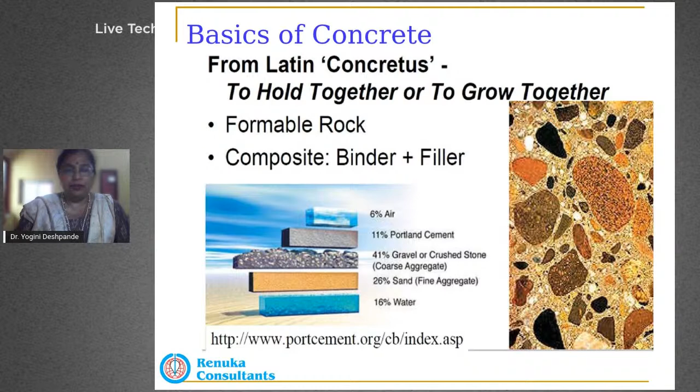Now, the uniqueness for us as civil engineers is that we are constantly moving between three scales. We design for, say, a 100-meter building, but that design is based on the strength of a cube, which is 15 centimeters, and the cube strength is developed based on the micro and nanoscale materials used to make the binder and the concrete itself. So the beauty of our work is that we constantly move between a macro scale, a meso scale, and a micro scale.

As civil engineers, we have to be aware of the effect of any defects that happen at a micro scale on the macro scale, or what may happen at a macro scale due to defects at a micro scale. So what I mean is, if there are shrinkage cracks, these typically happen at a micro or meso scale, but the effect is seen on the structure in a larger way, where there might be a structural failure because of inadvertent shrinkage cracks.

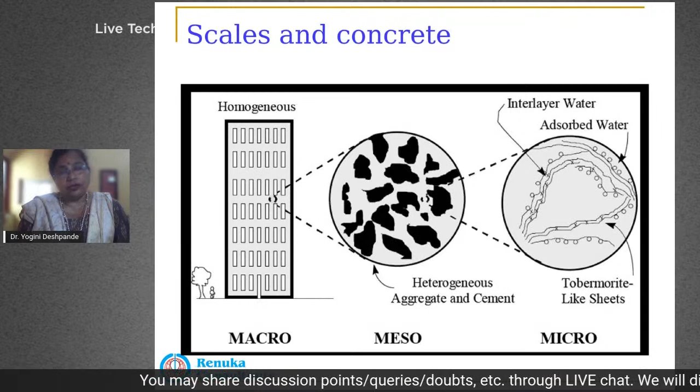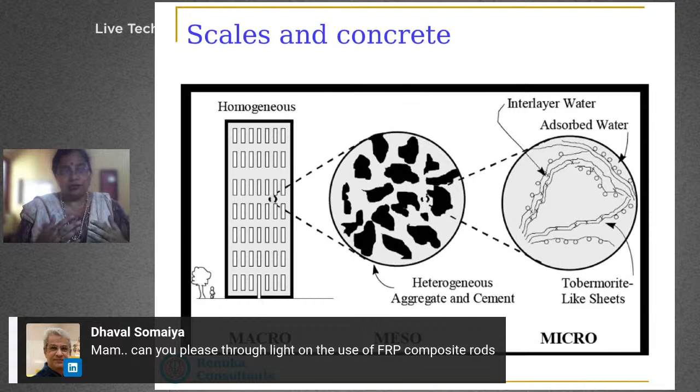The other way around, if we have a fire in a building, or any fire in a concrete structure, the structural failure happens because there is a large change in the microstructure of the concrete, and there are chemical changes that happen within the concrete during a high temperature fire, which causes structural failure, which may or may not be evident post the fire.

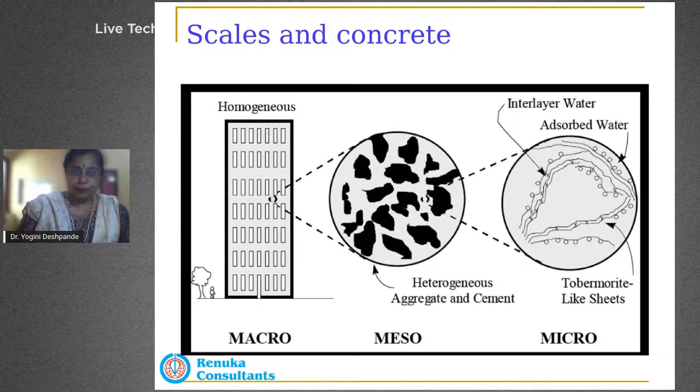So there's this aspect of where we have to, as civil engineers, be conscious about what is happening at different scales and how each is affecting the failure aspect on a long term basis. So for a very long time, till about early 2000, concrete was considered as a mixture of cement, water, fine aggregate, and coarse aggregate, and it was more like it's even today like a baking process.

That if you have certain ingredients, we calculate how much amount they have to be, and we put it together, and sort of, just as we bake a cake, we would make concrete. Today, we are continually using mineral admixtures and chemical admixtures to ensure that the concrete is sustainable for a long-term performance. In the past 15 years or so, the usage of mineral admixtures in the form of fly ash, slag, and silica fume has increased extensively. Because of the usage of these mineral admixtures, we're having to use chemical admixtures.

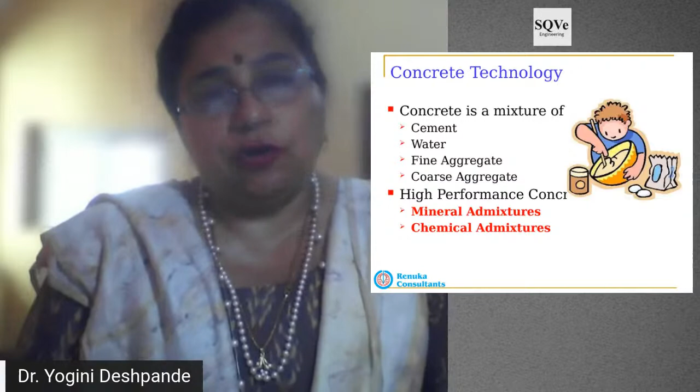So all of these have changed how the concrete behaves, how it performs, and what we are able to derive from the concrete very extensively in the past 15 to 17 years. And as a concrete technologist, as a concrete user, what we need to understand is how each ingredient affects the behavior of the concrete, how we can utilize the best aspects of each of these ingredients to make the concrete sustainable, to make the concrete durable. So be it cement, be it water, fine aggregate, or the mineral admixtures.

As a concrete technologist, I think it is very essential always to know what each ingredient is, how it affects the quality of the concrete, how it affects the performance in the initial stages, during the manufacturing, during the processing, during the travel, during the placement of the concrete, as well as during the hardening stages.

And if we are able to understand these aspects, then we are able to harness these qualities for a good performance concrete. And if we are not able to understand what these aspects are or how they are interacting with each other, then it becomes difficult to harness the properties and to have a good performing concrete.

And one of the major problems that occur at site is this lack of understanding, lack of knowledge that may be there, that does not allow us to harness the complete good aspects that can be derived from a particular material that we are using.

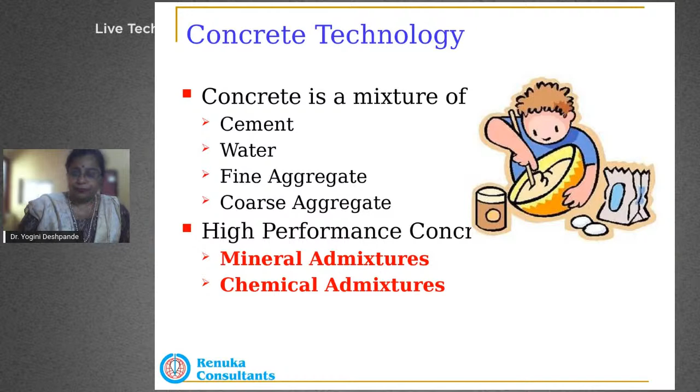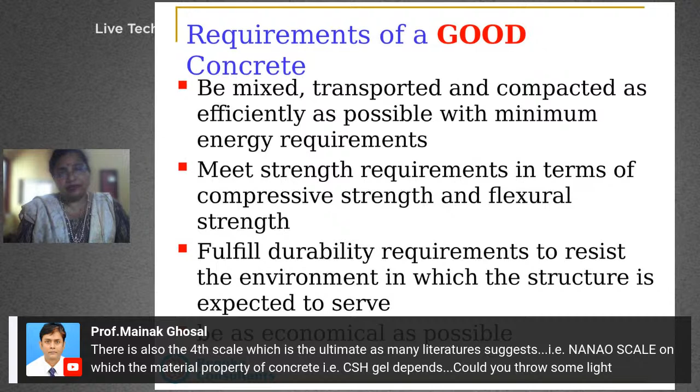So requirements of a good concrete typically are that it be mixed, transported, and compacted as efficiently as possible with minimum energy requirements. So your pumping requirements should be minimum. You don't want to have a higher amount of fuel to be utilized, higher amount of pump capacities to be utilized. You want to have good strength requirements in terms of compressive and flexural strength.

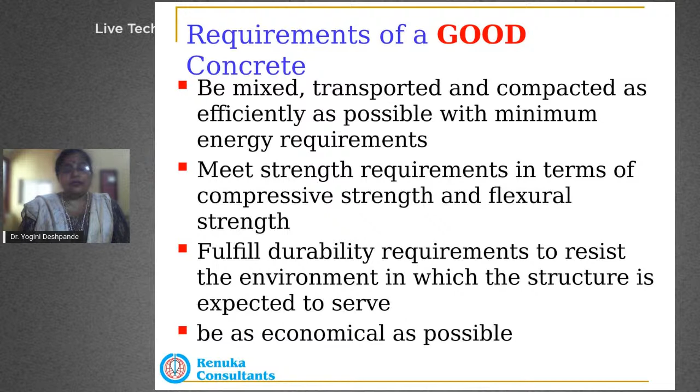You'll be able to fulfill durability requirements to resist the environment in which the structure is expected to serve. And while it is doing all of this, it has to be as economical as possible, so that we are able to ensure that for every paisa that we spend, we are able to get a long-term service from it.

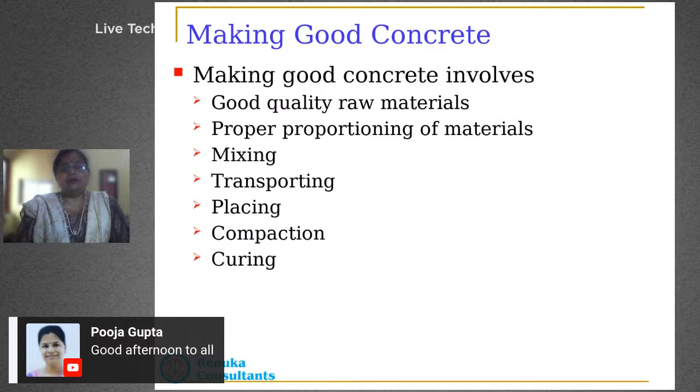So what happens is, when we are making good concrete, it involves ensuring that we have good raw materials, we have proper proportioning of materials, mixing is being taken properly, transporting, placing, compaction, and curing. All these aspects are being maintained during the whole process.

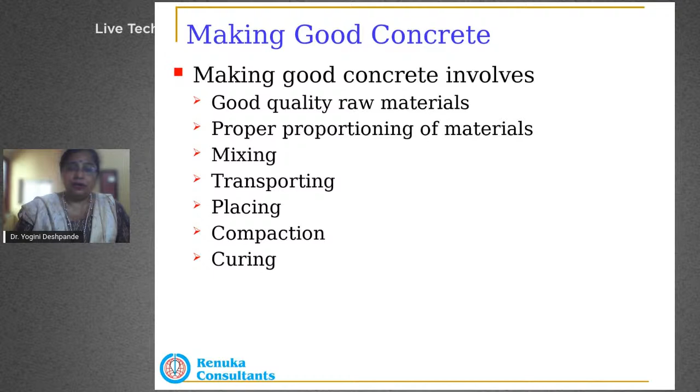Now, there are certain weak links that are there in concrete. When you have to have a good quality concrete, we have to ensure that the water quantity is correct. Anything less or anything more affects the strength, affects the segregation properties.

The aggregate quality should be good, the gradation should be correct. A very harsh mix results from aggregates that are of only a particular size in itself. There's not a smooth curve on gradation of the aggregates.

The volume also impacts majorly on segregation and compaction abilities. It also impacts impurities. If there is more clays or fines in the fine aggregates, it affects typically the ability to placement, as well as slump loss that happens at site because of these aspects.

Admixtures - the major issue that happens with admixtures is cement compatibility, but I believe the admixture industry today has resolved this extensively by ensuring there is a proper technical salesperson to ensure that for a given cement, a proper admixture is given to the concrete supplier. But the major aspect that many times happens is the addition.

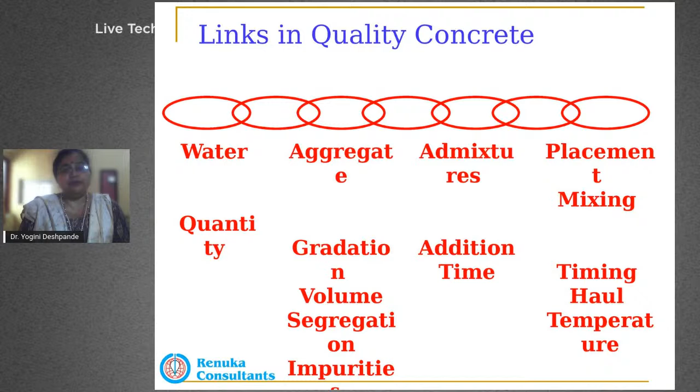Now, the addition and the timing of it depends primarily on what is the duration for which the trucks are going to be transporting the concrete. If the duration is less, we could have the whole addition at the beginning itself. But if the duration between the time it leaves the RMC plant and arrives at site is more, you typically want a half and half approach, where you add half the admixture dosage in the beginning, and the rest just a little bit before placement, or halfway through transportation.

This depends partially upon how much cementitious material is being used in the mixture, and also what kind of admixture we are using. If we are using SNF based admixture or PCE polycarboxylate based admixture, this also decides the amount of addition, as well as the time of addition of the admixture.

The placement and mixing, both of these make a major impact on the quality of the concrete. Placement basically deals with the aspect of pumping. If it is a high-rise building, pumping is a major issue. You have to ensure the concrete remains in a good, pumpable condition, with no segregation happening even while it is being pumped to 20 or 30 stories, and then being placed.

The placement and the mixing depends upon the time of day, the time it is going to be hauled from the RMC plant to the location where it will be poured, and the temperature at that time. All of these aspects affect the placement and the mixing.

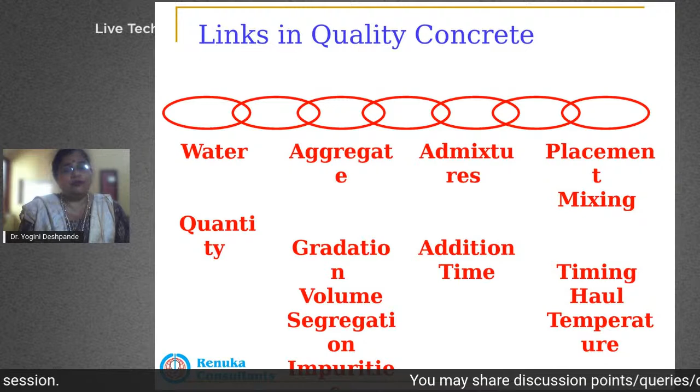For this, we have to ensure we are either using cooler water, ice, or icicles during mixing, or try not to do the placement during the middle of the day, between 12 to 4, and only do it in the early morning or later in the evening.

Now, coming to understanding of the cementitious materials, or what materials are being used, be it cementitious materials or aggregates - what are their properties, and how we are using them, how we can possibly use them - is very necessary.

With cement these days we use a lot of fly ash. We also use slag or silica fume. Cement is a much coarser cementitious material compared to silica fume or even slag. Fly ash is along similar lines to cement, but a little finer than cement at times. You do get ultrafine fly ash, which is much finer in particle size than cement.

So when making a mix design, understanding how the packing density is going to work for the concrete mix design is important, because we are designing for 1 cubic meter of concrete. What we start off with is the larger size aggregate, then smaller size aggregate, then fine aggregates, followed by cement, and the nano size particles that act as filler, as well as taking part in the chemical reaction with the calcium hydroxide. All of this has to be noted and ensured when designing the mix.

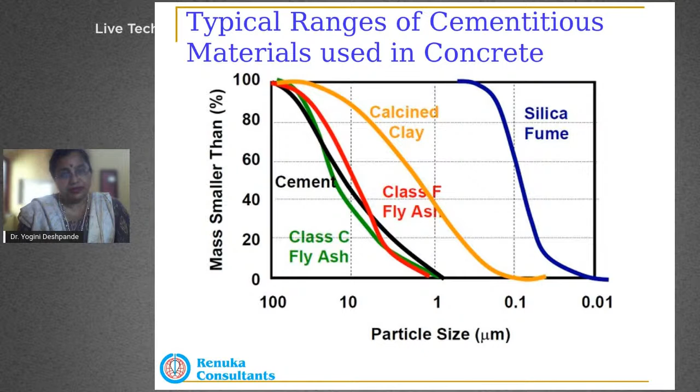What happens when we use supplementary materials is that typically for fly ash, we are able to reduce the water demand to a certain extent. This helps us in the strength, and this also helps us in the workability. Even with slag, it's the same thing. We are able to reduce our water demand while increasing the workability.

With silica fume, because it is a much finer material, one of the finest materials used in concrete today, there is a higher water demand. To counter this, we then have to use better chemical admixtures, which are slightly on the expensive side. The workability is also slightly reduced in case of silica fume. It's a stickier mix compared to fly ash or slag.

Bleeding typically is always reduced when we use any of these cementitious admixtures, and this is one of the biggest positive aspects of using supplementary cementitious materials. Once we have controlled bleeding, we're also able to control the segregation of the concrete.

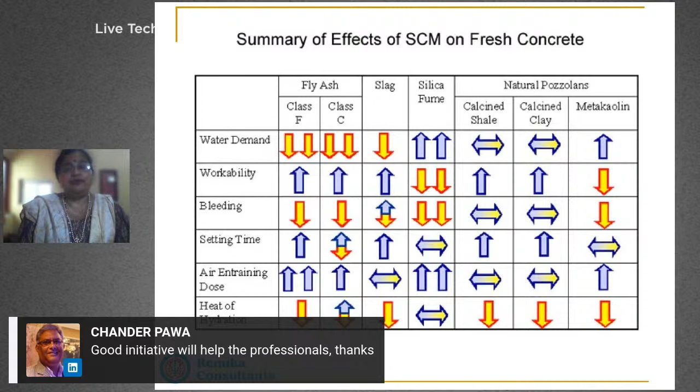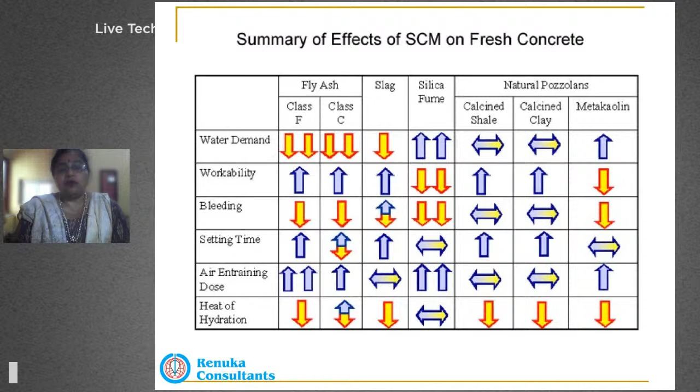So typically fly ash and slag will always help you control the amount of shrinkage that can possibly happen in the concrete. If you are having larger pours or larger size elements, it's always helpful to use fly ash or slag in the mix.

Early age strength gain is an important aspect for structural engineers because they want to start the next floor, the next stage of structural elements as soon as possible. Typically, if you use only cement and fly ash, it tends to give larger benefits in long term strength and durability, but not in early age strength. This can be countered by either using slag with fly ash, or using a ternary mix of silica fume with fly ash, or Alccofine with fly ash. This will help in having early age strength gains compared to just using cement and fly ash.

All the cementitious materials always benefit long-term strength gain, and typically compared to control concretes for the same water to cement ratio, anywhere between 5 to 7% up to about 30-35% increase in strength can be achieved.

Permeability - water permeability, rapid chloride permeability, all the different types of permeability issues we may have will get definitely reduced, because supplementary cementitious materials react with the calcium hydroxide generated in the cement hydration process after about 2 or 3 days. Once it starts reacting, the amount of pores developed in the concrete gets reduced, and this helps ensure a more impermeable structure.

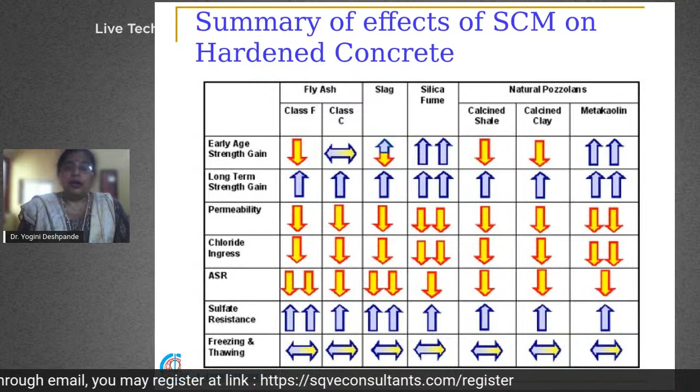Same thing with sulfate resistance also - all of the SCMs typically increase the sulfate resistance of the concrete. So what I'm trying to say through these two-three slides is that all aspects of concrete making depend on us understanding the positive and negative benefits of using different materials in concrete. If we understand and remember what each material brings to the table and how we can utilize it, then we're able to control the other issues that develop at site. Major issues that develop at site always happen during mixing and placing, or during curing and hydration hardening.

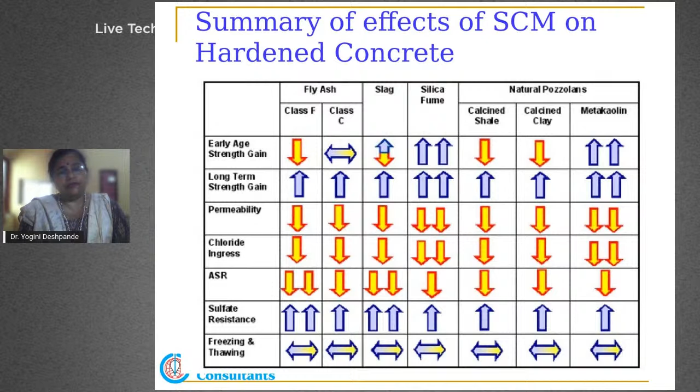Typically, from the first 24 hours to 7 days, cracking issues happen - early plastic shrinkage cracking happens. All these aspects can be controlled by ensuring we're utilizing proper materials, knowing which material gives us what property, and then ensuring the quality of these materials to have good concrete.

As I mentioned earlier, major issues that we have are a truck arriving late at site, which is related to admixtures, chemical admixtures, temperature or improper mix design of concrete itself, delayed curing, and shrinkage.

Now, what I'd like to point out in terms of improper mix design is this: many times builders or contractors do not have an understanding of how material variability happens. Cement is not the same cement - Ultratech cement is different, ACC cement is different, Ambuja cement is different. Not just that each cement is different, but each batch within each company could also be different. In the same way, aggregates - each lot of aggregate is also different.

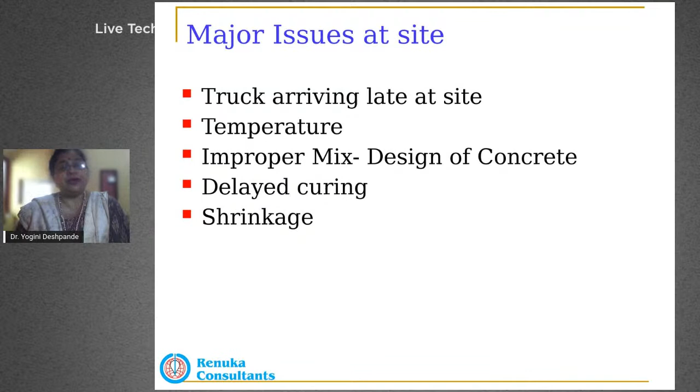So when you send materials for mix design, you have to send the same materials that you are going to use to prepare the concrete. The same should be sent for the mix design, and the mix design should be developed on that basis. Once you're able to do that, you're able to control the quality.

We have had many times people wanting to use a different cement for the mix design purpose, because the cement hasn't arrived at site, or whatever different issues they might be facing. What happens is that when we use one type of material for the mix design and another type of material during mixing - the name may be the same, aggregate may still be 20mm itself - but if the source is changing, if the batch is changing, then the quality of that aggregate has changed. Sometimes there's a large variability between what was used for the mix design and what is being used during mixing and placement during the concreting stage itself.

And this leads to a lot of issues. This leads to a lot of wastage of materials also. So if you are quality conscious from the beginning, you will be able to save at least more than 5 to 10% during the concreting process itself, if certain basic aspects are maintained right from the beginning, so that we achieve a good mix while concreting.

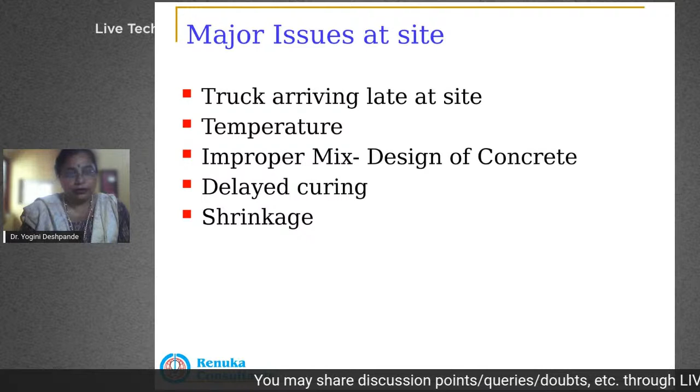I will stop here for now and see if there are any questions.

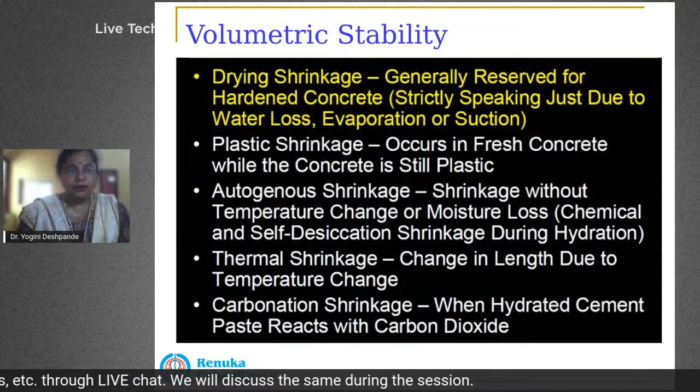Mr. Bhavin Shah, could we do that and then go back? Yeah, sure. Let us take a few questions, and then again we can discuss it further.

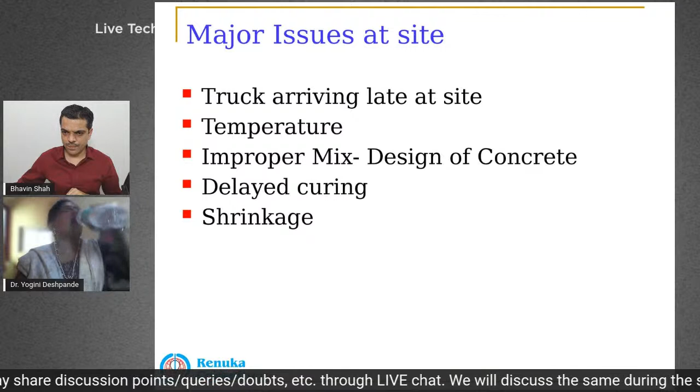One of the questions was: there is also a fourth scale, which is the ultimate, as many literature suggests, that is the nanoscale, on which the material property of concrete - that is CSH gel - depends. Could you throw some light on this? Okay, let me see if I have this.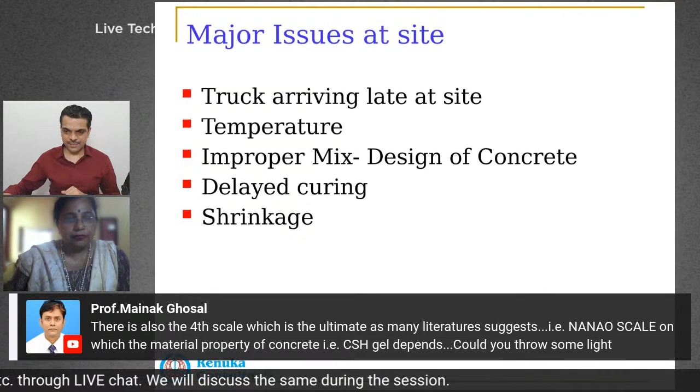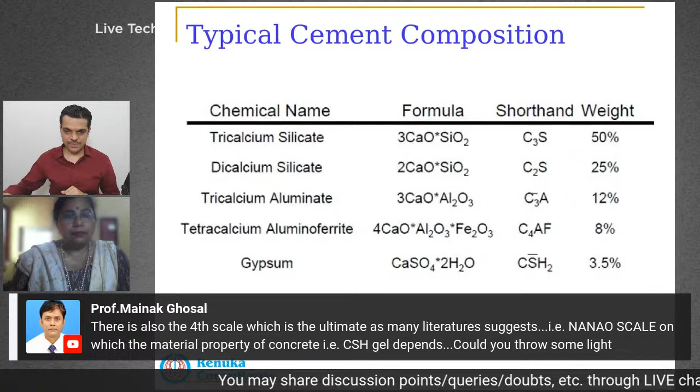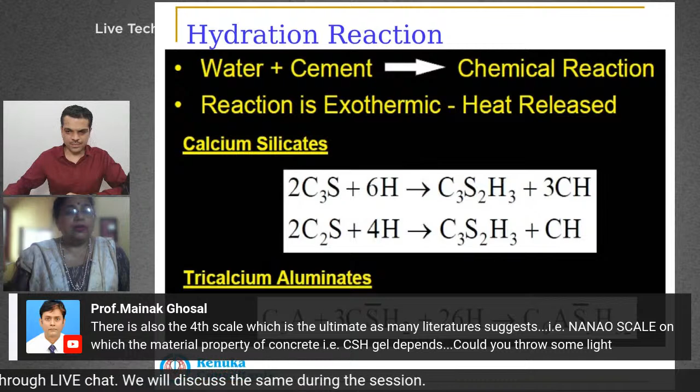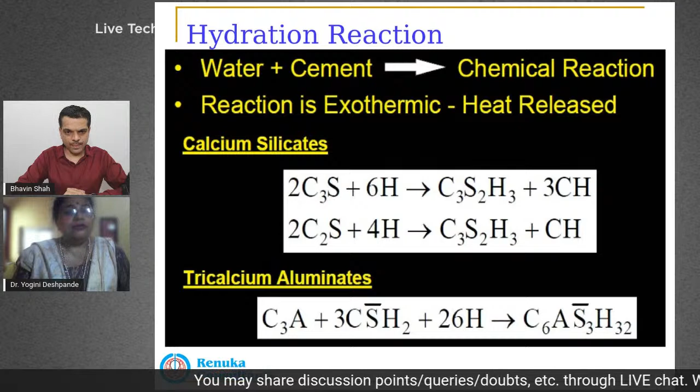Okay, so let's look at the basics first. What happens when water and cement react is a chemical reaction, and the reaction is exothermic. C3S, the tricalcium silicate, reacts with water to form calcium silicate hydrate and calcium hydroxide. The dicalcium silicate also reacts with water to form calcium silicate hydrate and calcium hydroxide. Tricalcium aluminate in the same way forms calcium sulfoaluminates.

Let me go back to one slide and explain how the cement hydration process happens. When cement comes into contact with water, a protective calcium silicate hydrate forms around the cement particle. This is when we're able to transport the concrete, because this protective barrier ensures there is no hydration occurring at that time. It just sits quietly, with a water layer all around the cement particle.

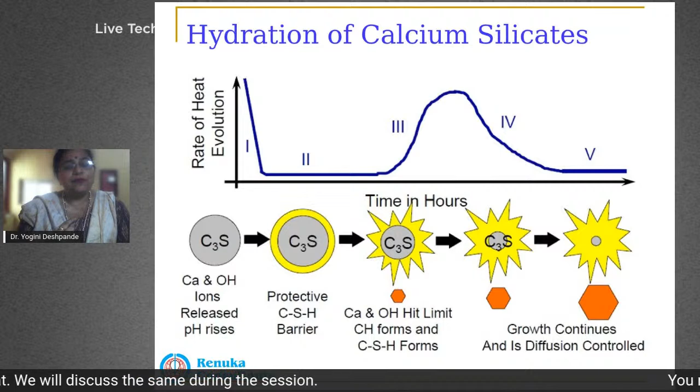The cement hydration process is similar—the hydrate product forms all around the cement particle, and that chemical reaction continues as the cement particle gets smaller. So after 24 or 36 hours, the particle has grown very small in size while the hydration product has increased in size.

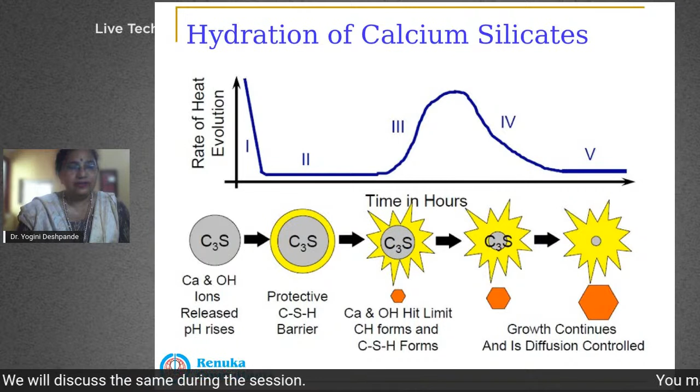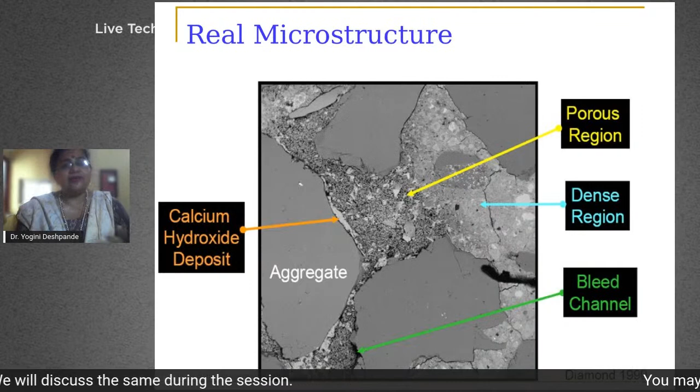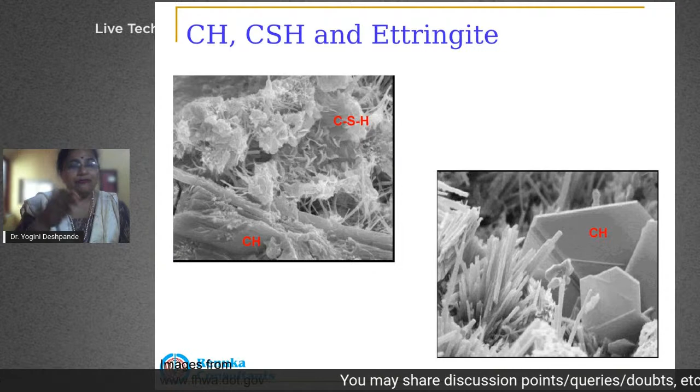This is what CSH looks like in a microstructure, while CH is more platy like. CSH is more amorphous and doesn't necessarily have a specific shape, but calcium hydroxide is more platy like, looking like stacks of files or plates placed one after the other.

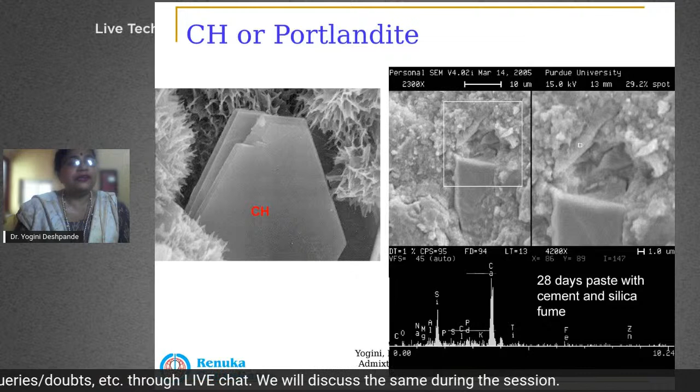This is an initial mix of silica fume, cement, and water, and you can see a lot of CSH is formed along with some CH. This is within about an hour's time of cement and silica fume being mixed together.

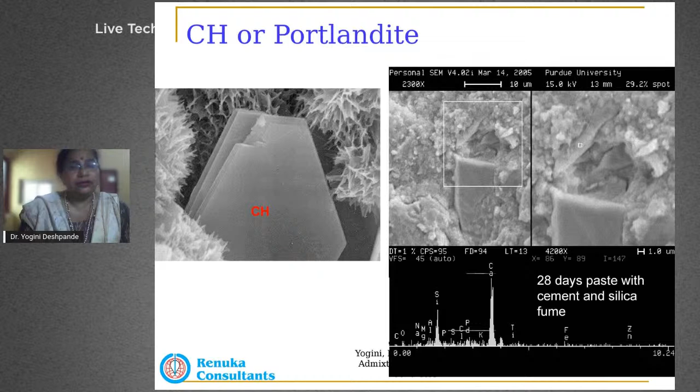This is much denser, as you can clearly see. This is at about 28 days with cement and silica fume, and you see such a dense structure has formed, with just one plate of CH remaining—not unhydrated, but a slightly more permeable aspect of the hydration product—whereas a larger amount of CSH is formed in case of silica fume concrete.

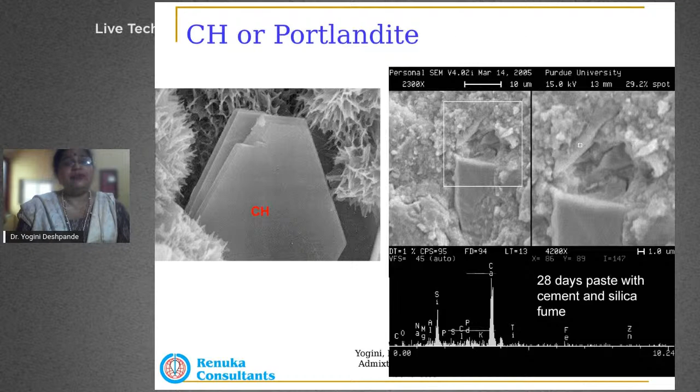This is why we say permeability is reduced considerably when we use an SCM: the presence of CH gets reduced, and any permeability that might remain within the concrete gets reduced, because much of the CH gets converted to CSH, which is a far denser product with very, very few pores left behind for water, chloride, or any other gaseous ingress.

One key takeaway is that cement doesn't necessarily completely hydrate when concrete is hardened. Some amount of cement particles continue to remain in that unhydrated stage over a period of time, and that is what is being

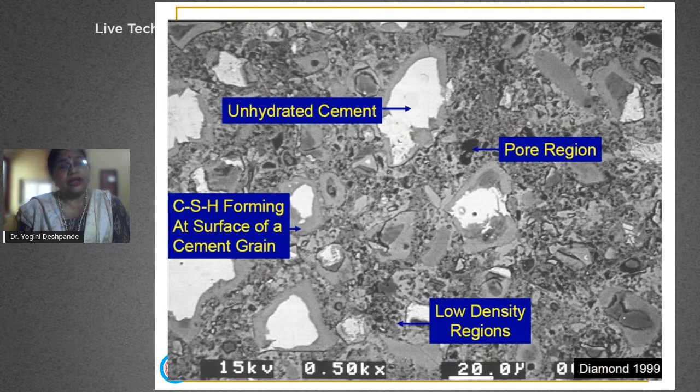utilized when we have certain waterproofing chemicals, or bacterial concrete being developed. The idea is that the unhydrated cement, or any CH that is formed, will react once a crack has happened, and certain CSH will get formed at that point, closing the crack again. Any next question?

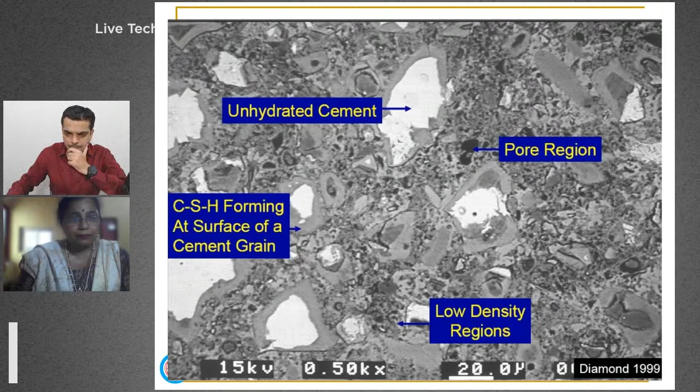Next, can you please share your views on green concrete, or if the concrete material which is obtained while dismantling of building can be used to replace cement at some percentage and increase the concrete strength?

Okay, great question. So green concrete, I'm not sure what you mean by green concrete. I'm assuming you mean using some kind of waste material, in which case silica fume is a waste material, fly ash is a waste material, slag is a waste material. So we have sort of mastered the art of development of green concrete in that sense.

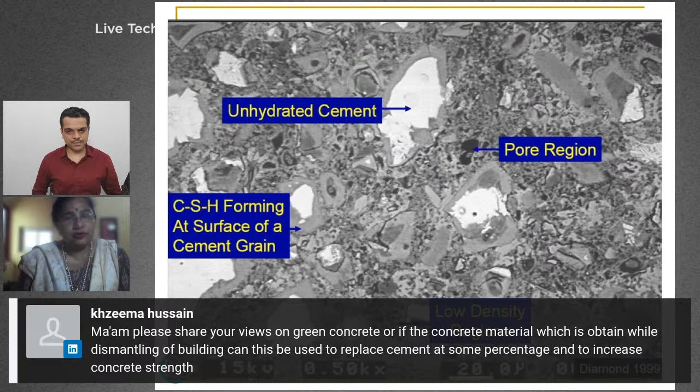Now, coming to your point of the demolished concrete, is it usable? Yes, very much. Actually, I've done a fair bit of research on using recycled concrete in concrete. This recycled concrete obtained from demolished structures can be utilized in the concrete in the form of aggregates. It's called recycled concrete aggregate, and this would depend upon what the initial concrete was, and how much deteriorated or distressed it is from a chemical perspective.

That is, how much carbonation has occurred in this concrete. If it's from a chemical industry, if it has had a lot of ingress of chlorides or other harmful gaseous materials, then it may or may not be advisable to use this kind of concrete back into an RCC structure. But we could definitely utilize such concrete as recycled concrete aggregate for structures which are non-RCC, like making paver blocks, or side pavements that might be required in a complex where the building is being reconstructed, or any such thing.

So elements which don't have reinforcement in them could definitely be manufactured using recycled concrete aggregate. And recycled concrete aggregate is used in a very similar fashion to normal aggregates. Only thing is we would have to ensure we're correctly calculating its density and its specific gravity.

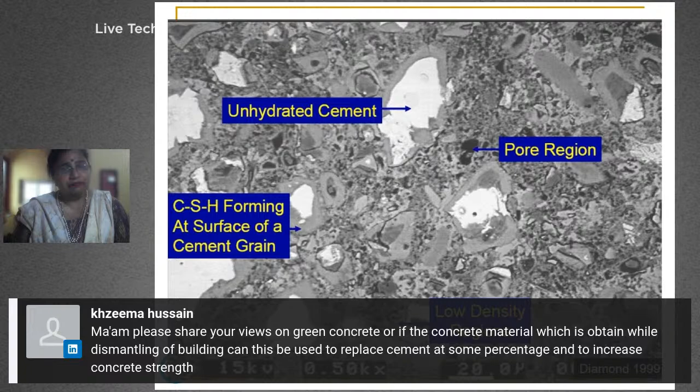But definitely recycled concrete aggregates do increase the strength, to a certain extent by about 5 to 7%, depending upon the initial unhydrated cement content left in that recycled concrete. Also, what it does is increase the bond with the cement within the concrete itself. So the bond properties between aggregate and cementitious materials are definitely improved if we're using a recycled concrete aggregate.

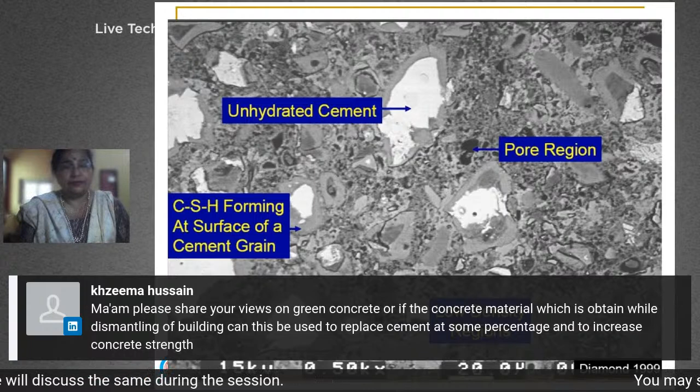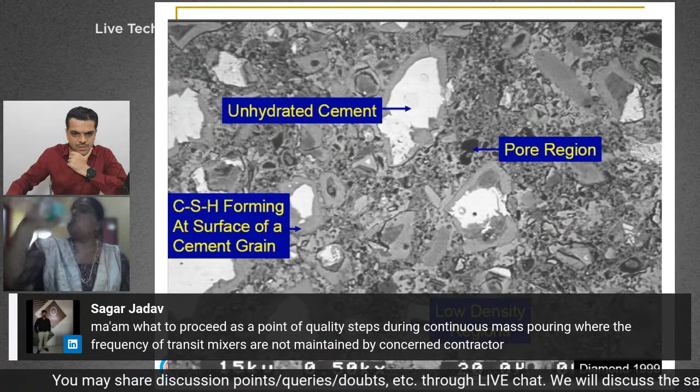Yeah, one more question. What steps to take as a point of quality during continuous mass pouring, where the frequency of transit mixers is not maintained by the concerned contractor?

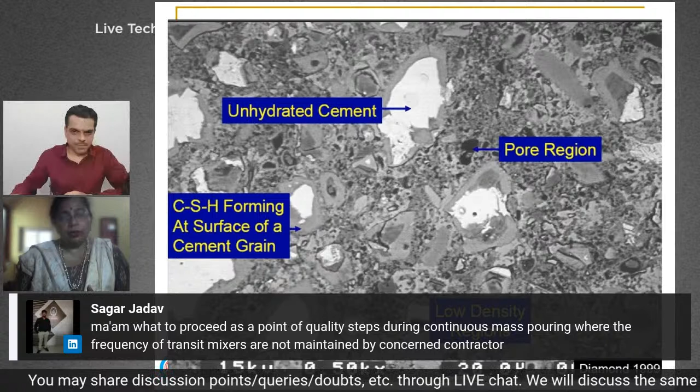You mean quality in terms of the placement process, or the concrete that's already placed, or as the mixers are coming in? If I consider the mixers coming in, what would need to be ensured is that the concrete is designed such that the concrete poured initially would not get hardened or start setting before your last pour. That has to be ensured, because otherwise there'll be development of cold joints and other structural issues, because if one side of the concrete has started to set before the last pour happens.

So that can be an issue. I think in such a case, you would have to have a discussion with the RMC supplier to ensure that certain kinds of admixtures are used, which will ensure there is a delayed setting of the concrete.

But delayed setting can sometimes affect your strength. So some amount of discussion or initial mock trial should be done to ensure you have good control over the strength and setting aspects. What could also be done is to use maturity methods to see the strength development and setting development that is happening over a period of time before the concreting is put into place.

Yes. So with this question, I was relooking into the points which we received through the registration form. That was one of the common questions, how far it is advisable to add admixtures on the site.

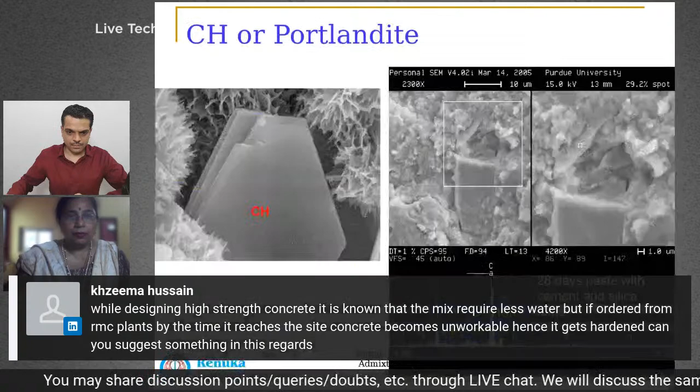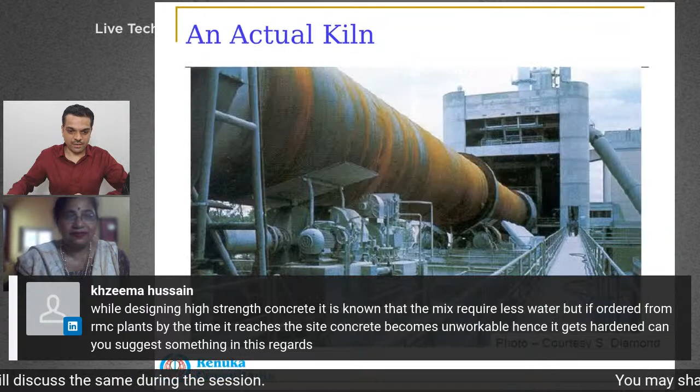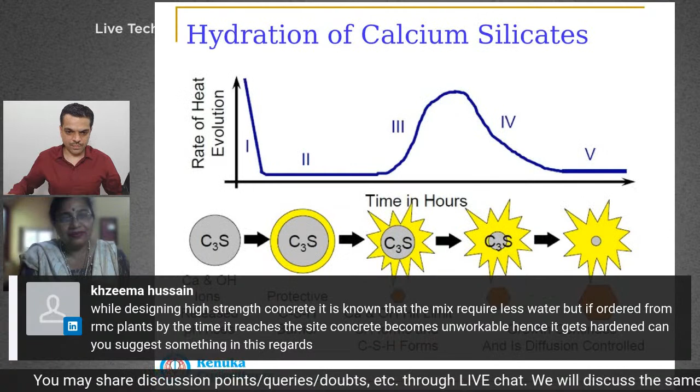Yeah, no, okay, this I think it was 25 or 26. 25, okay okay. A little ahead - yeah this one. So the earlier one, it was correct. Go back. This one? Or just before would also do. The before one will also do.

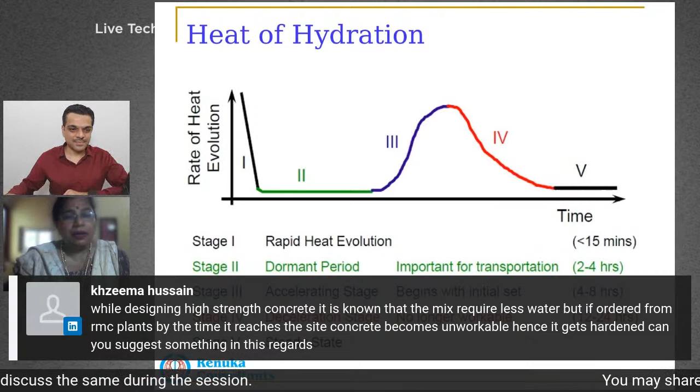So if you look at this slide - I'm unable to see at the bottom, but if you are able to read it, you would see there is stage one, stage two, stage three. Stage two is the dormant period, an important stage when the concrete is still dormant and you're able to transport it, remix it if necessary at site a little bit, and then pour it. During that whole process, even as the concrete is moving, the hydration process is not taking place. But if it has been more than 4 hours, the hydration process starts, there is an accelerating stage, and the initial set begins.

Once the initial set has begun to a certain extent, utilizing that concrete for placement is going to create havoc, especially if you're dealing with high pressure pumps - it gets stuck within the pumps and creates a lot of issues. So there's really not much you can do, other than ensuring the concrete reaches site before that, or utilizing retarding admixtures between the 15 minutes to 2 hour stage - if you're able to add some amount of retarder so that setting does not begin for the concrete.

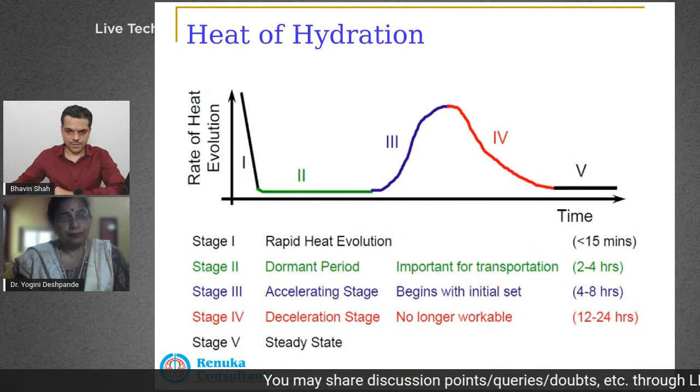Which SCMs or SCM combinations have better service life or durability? There is no specific thumb rule, because what is it that you need to achieve, and what are we agreeable to pay - both these aspects govern it. Almost all SCMs are good from a durability perspective. It's not that a certain combination will always work or may not work.

Typically slag and fly ash works well, or silica fume and fly ash works well. Silica fume gives us strength, fly ash gives us workability, and it's a win-win situation from a long-term perspective. A lot of people think silica fume concrete tends to have cracks or shrinkage cracks, but that comes from aspects of curing, when the concrete was poured, and the temperature at that point, because silica fume concrete tends to be a little sticky and has higher water demand. So we can't say one combination works well and the other doesn't - if you ensure the quality aspects, any combination is going to be good.